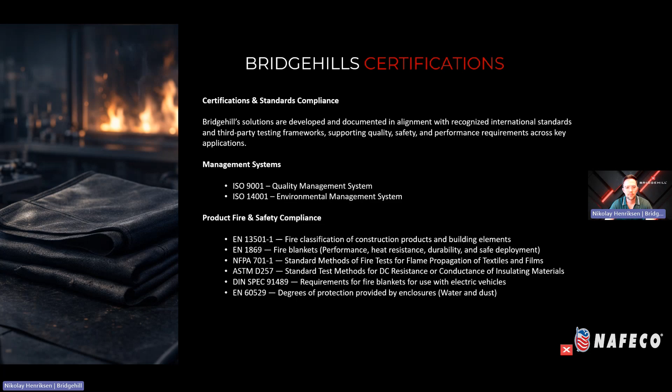So let's jump right into the most important topic of the webinar: the challenges from EV fires. I know some of you are pretty knowledgeable on this matter, so this webinar will cover some of that information, aiming on containment. We'll be covering this slide explaining thermal runaway in maybe a different way than you're used to. I like to explain it in two phases.

Right in front of you, you have one phase that can be a trigger event or an internal chemical breakdown, and the other phase that is off-gassing and ignition. The reason I like to divide this into two main zones is because when one battery cell goes into thermal runaway, the trigger event or internal chemical breakdown can actually react in minutes or years. So that process can last a very good amount of time. Well, the second stage, off-gassing and ignition, is usually something that happens in seconds.

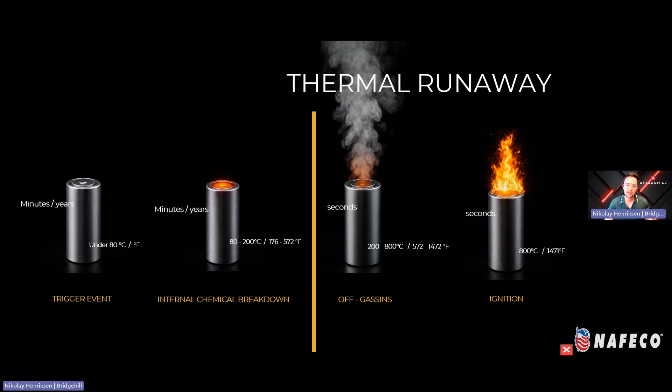So it's important for us to understand, because one of the biggest problems is reignition risks. A battery in an EV consists of approximately 7,000 battery cells. And as these battery cells can reignite on their own time, some can reignite in minutes and some others can reignite in years, we have a reignition risk.

Meaning that right in front of you, we were just creating an example where we say that every 30 minutes, one battery cell is going to start its thermal event. And with 70,000 batteries, in a theoretical example, if you have 70,000 batteries burning every 30 minutes, that's a fire that's going to last a long time, right? So this is just to explain why EV fires become so difficult to control.

You may be able to suppress an initial thermal event, but then you have another one coming in 30 minutes. Then you have to deal with that. And then you have another one coming in 30 minutes, and then you have to deal with that. Maybe the other one's coming in 2 hours, and then you have a reignition again. And this is happening. So this is why firefighters have to utilize copious amounts of water and so much time and effort dealing with these fires.

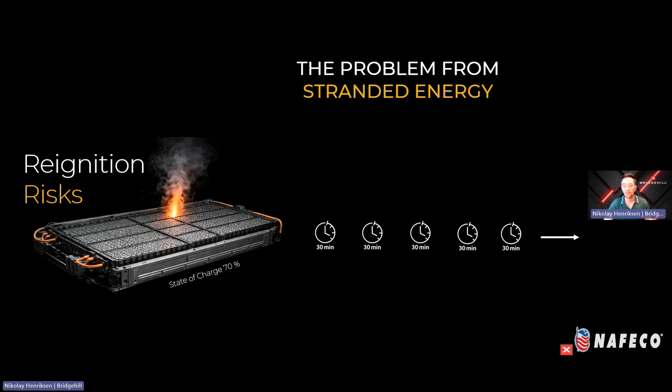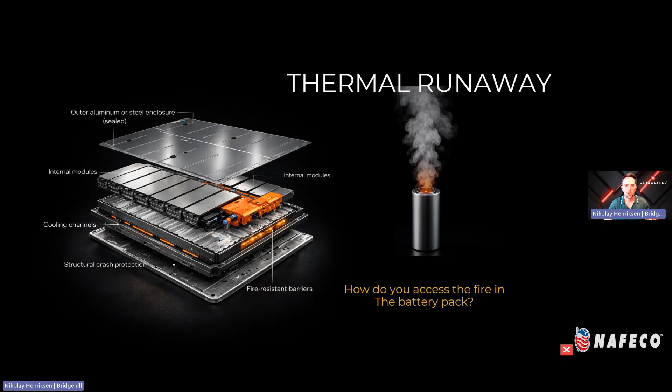And they're all different. The other issue, aside from reignition risks, is also that they are heavily sealed. So the main source of the fire is not easy to access, right? We're talking about several layers. Every vehicle is manufactured differently, but it's usually 9 layers.

One of the biggest practical barriers is going to be the floor pan metal, which is usually steel, the structural reinforcement, which is high steel, the underbody shield, which is usually aluminum alloy plates, the battery pack casing, which is cast aluminum. So there's a lot of different layers. You have the carpet, even foam. So there are so many layers for cooling agents to go through to efficiently suppress. So those are obviously important things that we need to consider when dealing with an EV fire.

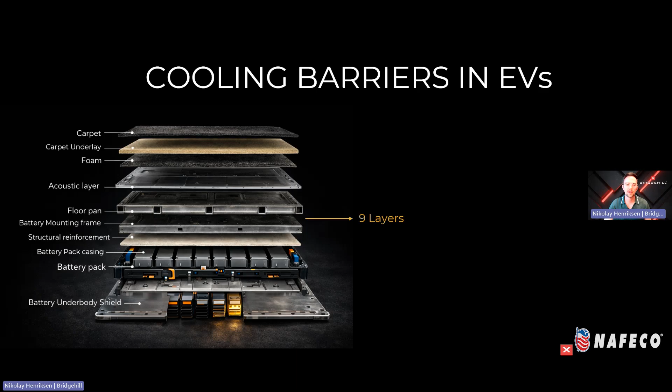So some of the risks. Let's talk about what those risks are. As I mentioned, we're talking about the stranded energy problem, which is reignition, right? As long as there is energy in a battery, they can reignite at any time. They can reignite in 1 minute, they can reignite in a couple of weeks, months. We've even seen situations where damaged EVs that underwent a thermal runaway reignited after 2 years.

So the other problem is going to be toxic gases, which we will focus on in the upcoming slides as a big problem. And visually it will usually look like this white smoke. And obviously, the spread of fire, which is a problem, but it's not the largest problem. So let's talk about this toxic cloud and the absorption routes coming from EV fires.

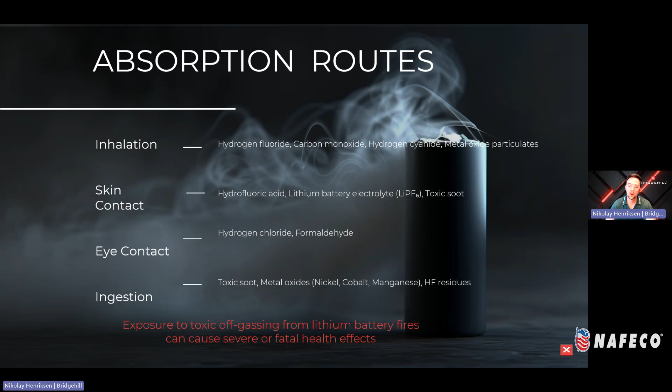So inhalation is definitely the worst and most dangerous absorption route. This is where people can inhale high concentrations of heavy metals. But you also have other absorption routes. Skin contact, eye contact, and ingestion can also be harmful for your health. And depending on the concentration, they can be really bad for your health or fatal. So for firefighters, this is obviously an issue. We're talking about a pretty toxic cocktail of gases. This obviously is going to go into your PPE.

So we see that it's not only for firefighters who are close to the fire, and we already have good examples in real cases. Last year in Sacramento, there was a Tesla Model S that started to burn. And there were some firefighters without their breathing masks on, and they were standing approximately 200 to 300 feet away from the fire. The toxic cloud was blowing towards them, and they started to inhale these gases.

From this, of 5 firefighters, 4 of them got pretty sick. 3 of them underwent respiratory damage and problems so that they can no longer work. And one of them was suffering severe fatigue and lung damage. So we see that these fires are not only harmful for firefighters very close to them, but even at long distances. This is obviously a big problem, but it actually gets worse.

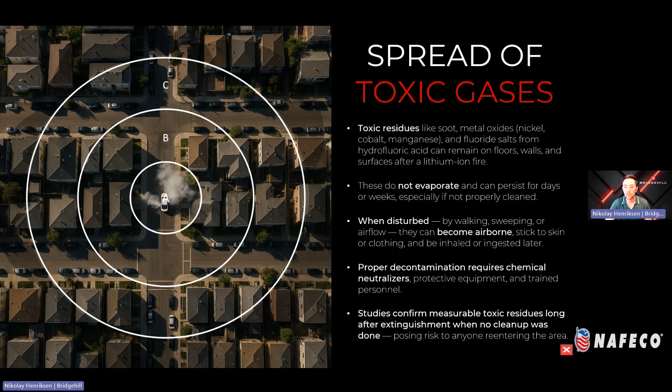So let's say you have a pavement or just a normal parking lot, and you have some of these heavy metals touching the ground. If you were to walk or if there's heavy wind, some of these particles can become airborne again, and you can inhale them, which could obviously be negative for people's health. So now we're talking about post-contamination risks as an issue.

So let's bring some, not testing, but real data on this. This video right in front of you is showing how a lithium battery plant burned and generated 55 pounds of heavy metals. What they found was copper, nickel, manganese, and cobalt on soil samples up to 2 miles away from the lithium battery storage site.

So this is no longer a test. These are now facts that lithium-ion batteries create toxic metals, such as copper, nickel, manganese, cobalt. They don't evaporate, they stay on the surfaces, and then they can be spread miles away. So this is a big problem. Obviously, this is a battery plant, so let's put it into EV words.

An EV battery contains roughly 100 to 150 pounds of heavy metals. So that would be the worst case scenario of what you could spread, right? But also important is that if you have a very small airborne concentration of these heavy metals, just 0.015 milligrams per cubic meter of nickel may already be a problem for your health. So it really takes very small doses for this to have a negative impact for civilians out there.

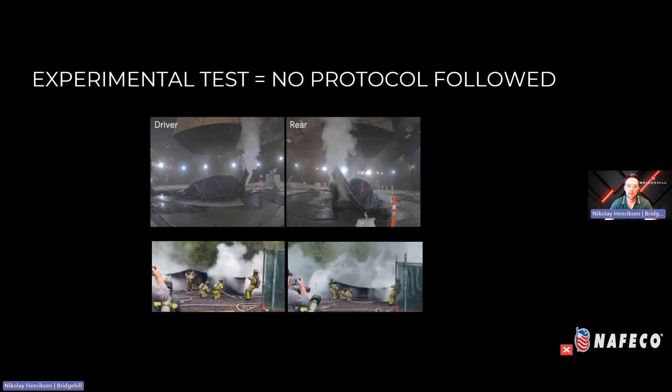Underneath, another test was mixing different types of methods, different tools. Underneath the blanket, they required lifting, introducing oxygen again. And all of this is very much correlated with information firefighters already know. Backdraft theory is already something that everyone is familiar with as a firefighter. That backdraft theory is probably something that I like to utilize to explain deflagrations.

So when there's an incident where you have a reaction from the oxygen on an EV, that's called a deflagration. It's very similar to the backdraft. You basically have production of hydrogen underneath the vehicle. It starts to increase. So you have fuel, you have flames, and the flames are eating up that oxygen. As you lift the blanket, you will have a backdraft, right? So this is explaining the importance of not lifting a tool that is supposed to deprive an object of oxygen. If you want to contain something and deprive it of oxygen, the opposite of that would be introducing oxygen.

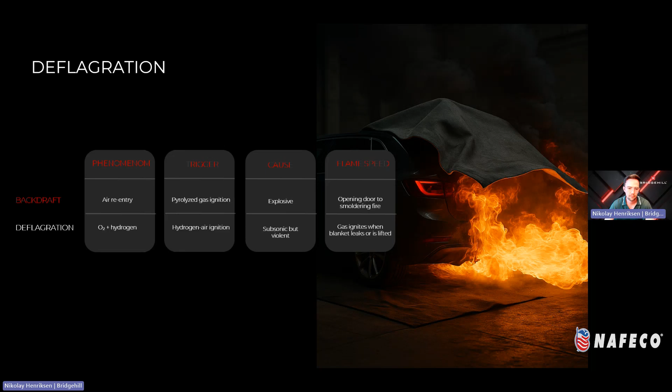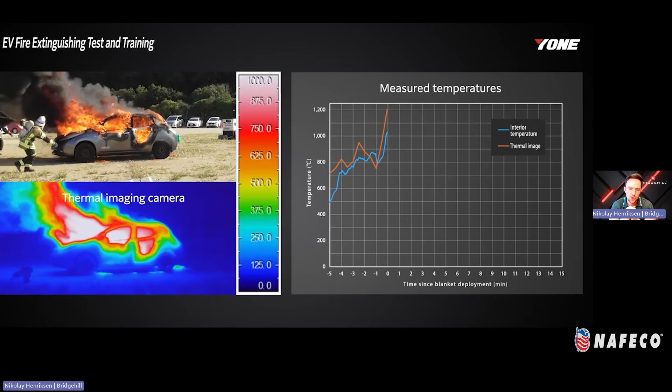So let's now look at how a correct deployment would look. And here, I really encourage you guys to look at the graph, because the graph will show reignitions from that battery, so new thermal runaways.

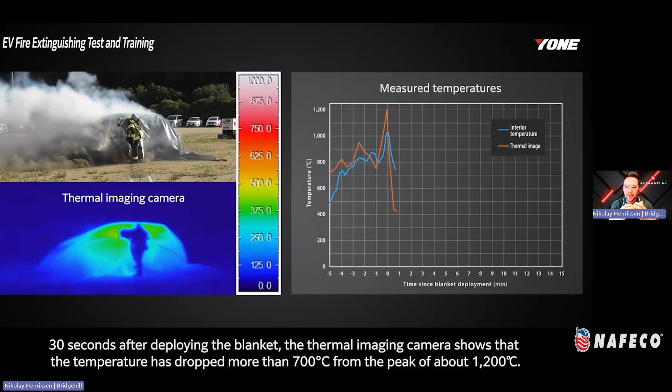So now you see you're deploying the blanket, you're depriving the object of oxygen, you're going around the vehicle, making sure that it's airtight as much as you can. There are no big air gaps. Fire blankets will always allow some amount of air gaps. It's not going to be 100% sealed, but it's having a huge effect on the temperatures and the smoke, as you can see in the graphs.

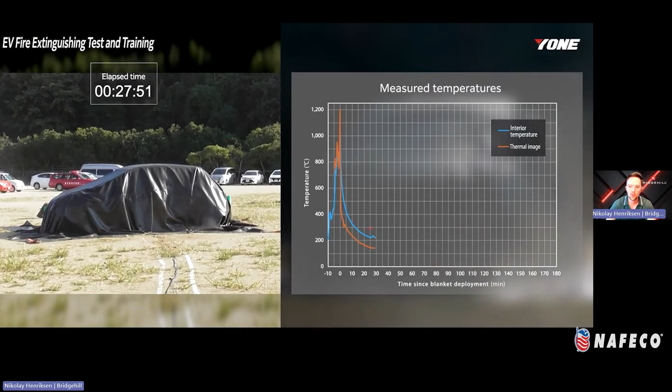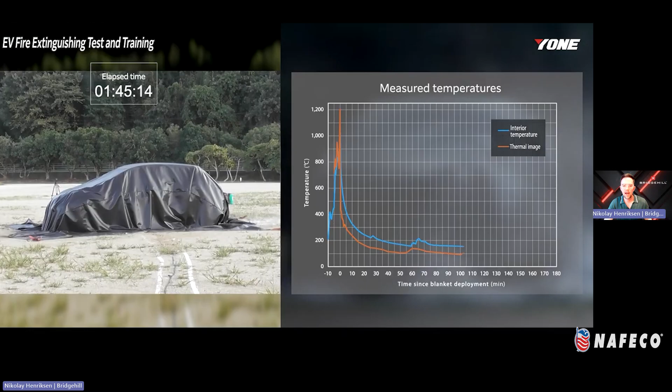So now you see at 25 minutes there's a peak because there's a new thermal event, a new reignition under the blanket. And now we see at 59 minutes, another thermal event. At 1 hour and 45 minutes, another thermal event. At 2 hours and 12 minutes, another thermal event.

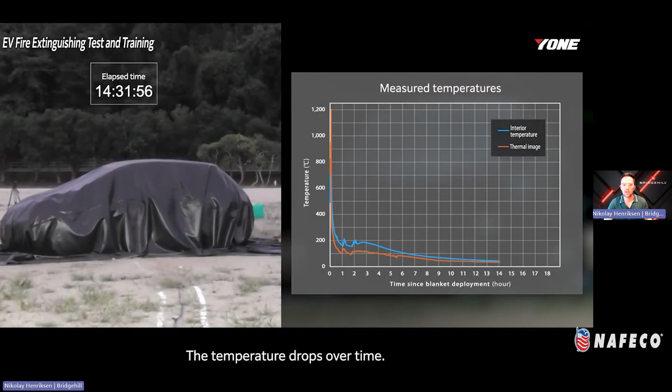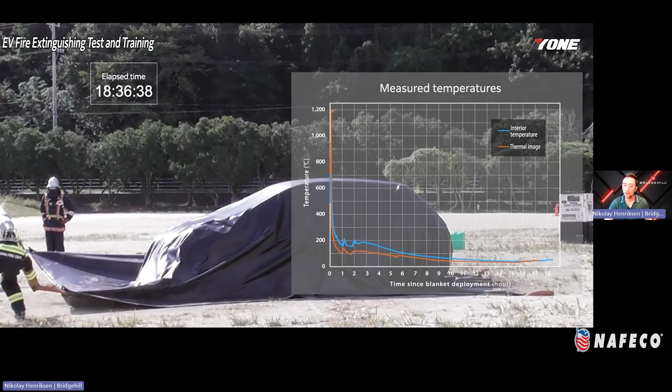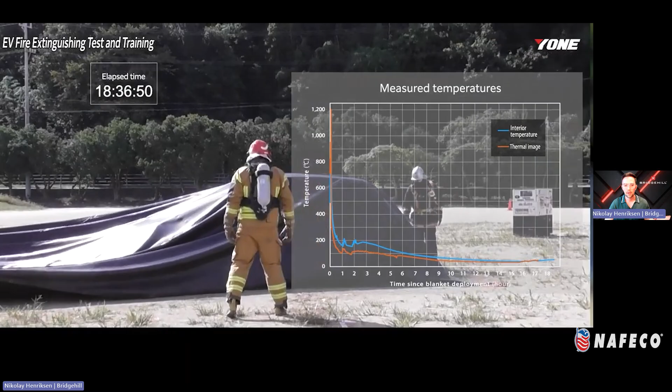And then after many hours, the temperatures start to decrease. You can see that it's basically mirroring the exterior temperature, and then the blanket is removed. So in this case, we're talking about a thermal event that lasted approximately 18 hours. Compare that with suppressing it for 18 hours: a lot of water. And as we have learned, there are a lot of toxic heavy metals being spread through the environment.

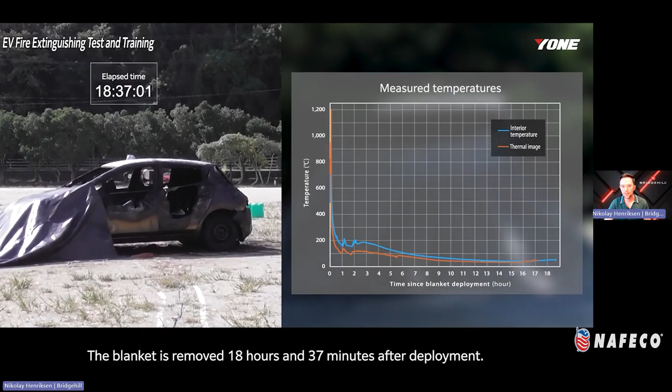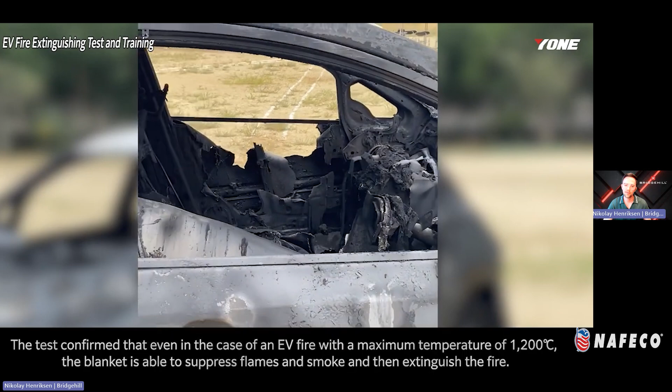So this is usually how you would utilize it correctly. As you can see, temperature has dropped, and now you remove the blanket. At this point, obviously, it's 18 hours, so they waited a lot of time to remove the blanket. But there are obviously no flames, no fuel, no flammable gases inside or anything like this, making the removal of the blanket really safe.

So let's talk about best practices. So what happens when you deploy a blanket? We are obviously stopping the spread of fire. As long as the blanket is big enough to cover the burning object, you will cover that, and that will immediately stop the spread of fire.

But we're also isolating those toxic gases. And as we saw previously, we're talking about a spread that can go, in worst case scenarios, 2 miles of heavy metals spreading to the environment. So that is obviously good for the environment, but we're also reducing stranded energy risks. The reason we're saying this is because a containment blanket will be on top of that object. If it reignites, it's still contained. So the results are the same.

So as long as you're going for this approach, it becomes pretty much very predictable. So obviously what we're doing is drastically reducing the levels of oxygen once you deploy a containment blanket on an EV.

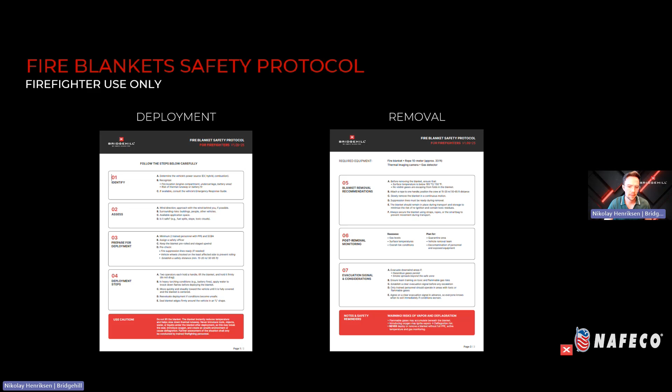Fire blankets and how to utilize water on them. This is a very common question, right? Can I utilize water when I'm utilizing a containment blanket? Yes, you can. When? Prior and after deployment. Our recommendation, based on all of our knowledge, is that prior to deployment you will want to utilize it if there's heavy torching conditions, a lot of flames, where you as a firefighter think, well, this is a lot for me to expose myself to.

So I want to knock down those torching conditions or the flames first, and then deploy. So you would want to do that and then deploy the blanket, and then right after removal, after you follow the protocol that I mentioned before, then you can also utilize water.

Another thing that I can mention: for those fire departments who have an under nozzle, a piercing nozzle, and want to utilize it, how would we recommend you utilize that? Usually you would want to protect the ground when you are doing this. If you have a structure situation, maybe a 3rd floor garage with an EV burning, what you want to do is rapidly deploy that nozzle underneath the vehicle. You're protecting the ground, and then deploy the blanket, right?

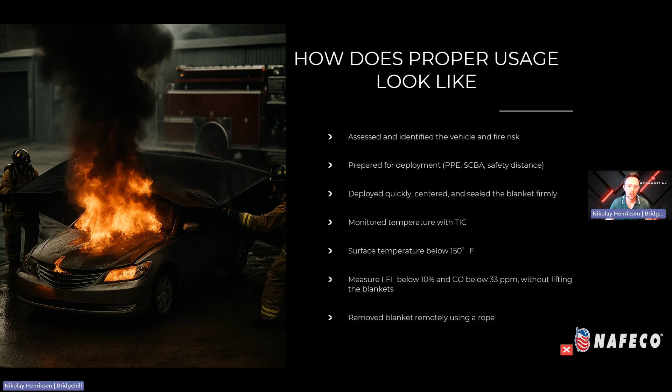So rapidly, before we finish, I want to cover suppression versus containment. I want to have this little comparison. Let's talk about suppression.

When it comes to time, how long would a battery burn, how long would this thermal event last? The reaction, you really don't know. As long as there's stranded energy, there's going to be reignition risks. Water can also damage components in the battery, which can increase probabilities of reignition in some cases. So it's very difficult to know how long it's going to last. The same goes for containment. You just don't know how long the battery is going to last.

But when it comes to the efficiency of suppression, the flames will basically stop once the cooling agent is fully efficient. So once the cooling agent is working, you have that effect. With containment, you have immediate containment once the blanket is covering the entire object. So those are pretty similar.

But with a battery fire, as I mentioned, you just do not know how long it's going to last. The difference is that you do know it will burn and reignite in a confined situation when it comes to containment. But the biggest comparison between suppression and containment is not mainly about the current fire, but the post-contamination risks and long-term effects from an EV fire. Lithium-ion batteries spread toxic metals, manganese, cobalt, and so on, that don't evaporate, moving hundreds of feet, becoming airborne, and probably impacting civilians. That's where smoke and gases vary.

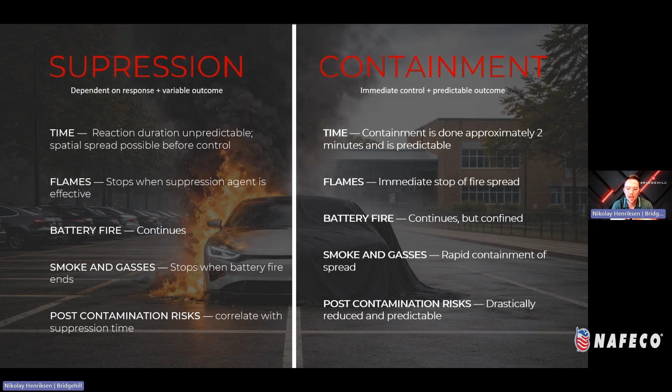Post-contamination risks are very different when it comes to containment, and that's why containment becomes such a crucial tool today. It's a very important topic to understand that these fires have a much bigger impact than we're thinking. This also applies to enclosed areas, where you can have spread of toxic metals in an enclosed environment, in an office, in a hallway, or in an elevator, with people inhaling high concentrations of this.

So obviously, fire blankets become great tools, such as the one in front of you. There are also containment tools that are much smaller, in order to control and minimize damage for smaller situations, not just EVs.